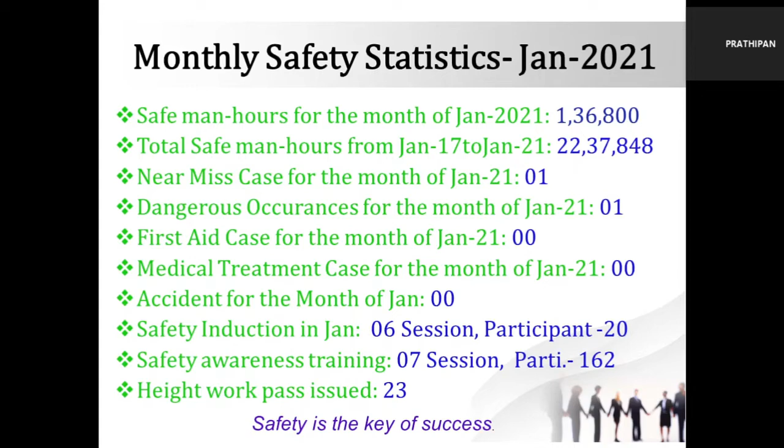Safety induction in January we have conducted 6 sessions and the participants were 20 including KPTL and Elemech. Safety awareness training 7 sessions and participants 162. Height pass has been issued, total 23 numbers in the month of January.

So the next one is the review of previous meeting.

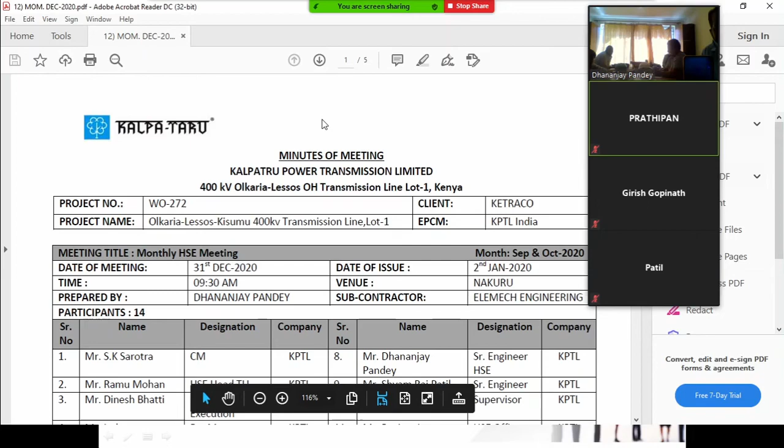Okay, so review of the previous meeting. Toolbox talk should be regularly conducted before commencement of the work and explain the work related hazards and control measures.

In the Krishna team, it has been reported that they are not conducting since last week. Mr. Tony.

We had an issue with the safety officer. I think we've been able to get a new steward then. Yeah, we've been able to get a new steward in his area. So I think from Monday they'll be able to continue the toolbox meeting.

Have you looked at the new safety steward for that site? I will meet him tomorrow. Tomorrow I'll be going to Naivasha. Okay, so I'll sit with him and at least just assess how he is and whether he actually knows what was expected of him.

Okay, yes, so please arrange one steward for the Krishna team. Okay, no problem, it will close on Monday. Yes, I will meet him on Monday.

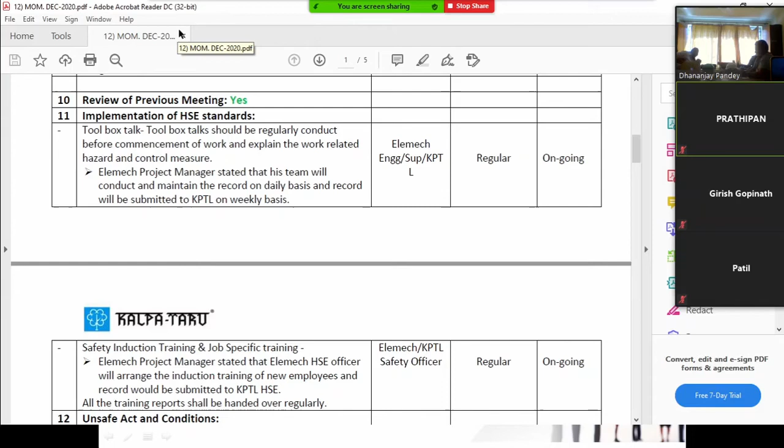Okay, the next point was unsafe act and unsafe condition. Safety lock of the single sheave pulley was observed in broken condition, so it has been repaired. The next one was wire rope sling observed in wear and tear condition, which is being used for pulling as a marking lead in manual team.

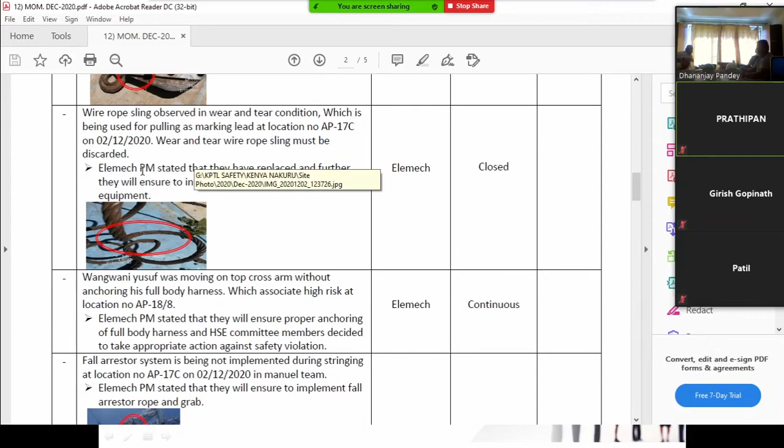That was replaced, I remember. That was replaced. The next point was Wangwani Yusuf was moving on the top cross arm without anchoring his full body harness, which poses high risk at location number AP 18 by 8.

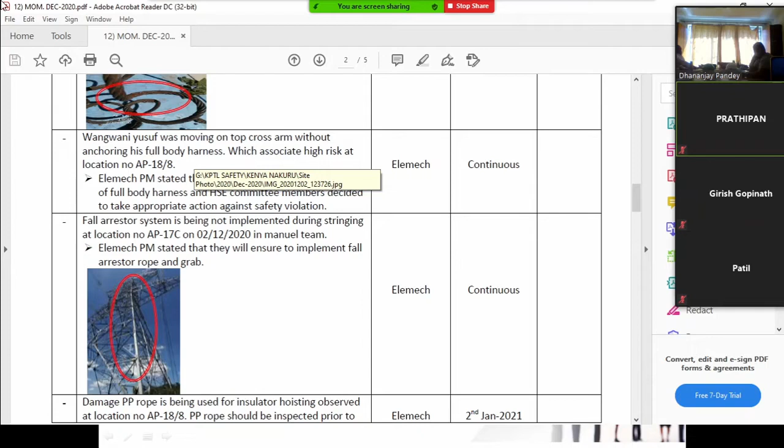No, but still the same unsafe practices are being done by the other teams. Some technicians are moving at height without anchoring their full body harness or safety belt.

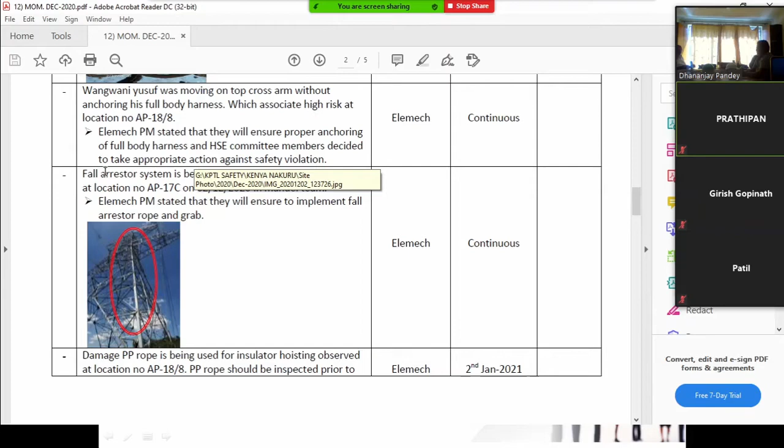We need to address this, because we don't know if any accident or mishap has ever been informed to anyone. Okay, then I think let's put emphasis on this in the toolbox meeting.

The next point was the fall arrestor system not being implemented during the stringing. So still we have the same issues in the month of December and January.

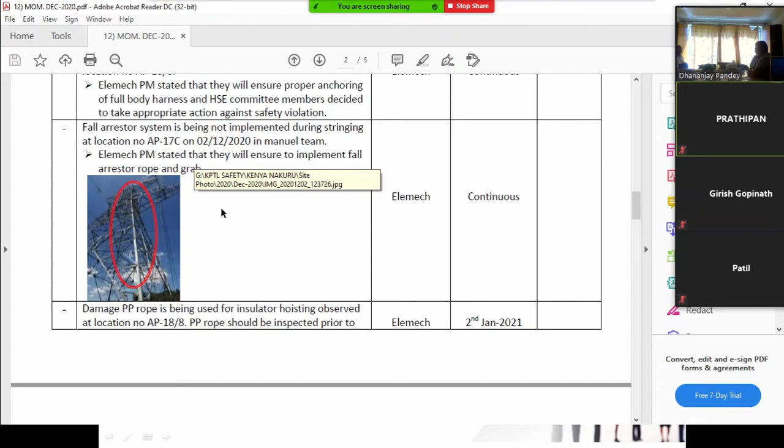This point has not been closed. They are not maintaining it continuously - the fall arrestor system, not the body harness - for climbing up and down safely.

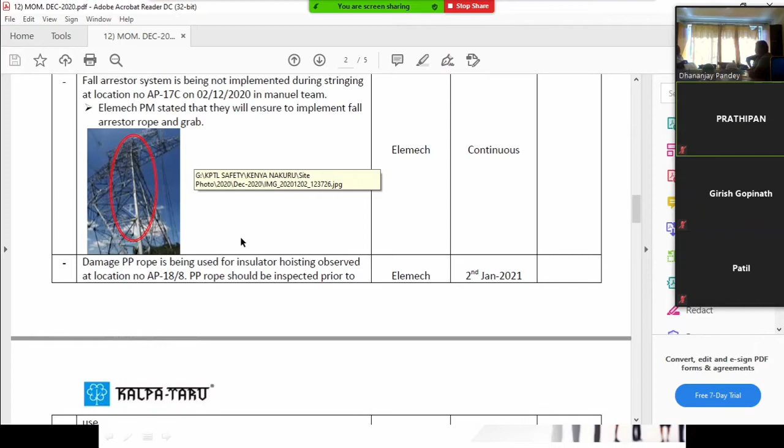Okay, let me put emphasis on this also. Please write down the points. It is for all the teams. Yes, the next one was damaged PP rope being used for insulator hoisting.

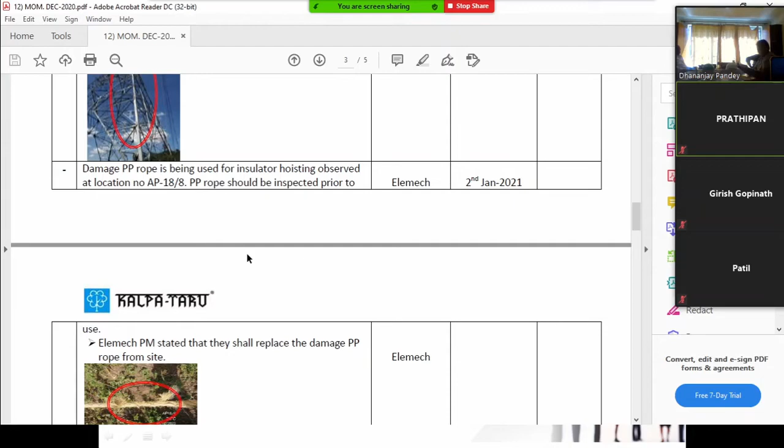Observed at location AP 18 by 8. It was observed in Banyan team. But one accident happened at manuel team due to the breaking of the PP rope.

Okay, so any unsafe observations which we find at the site have the potential to cause accidents, and that resulted in an incident at manuel team, so at least we need to focus on our tools also.

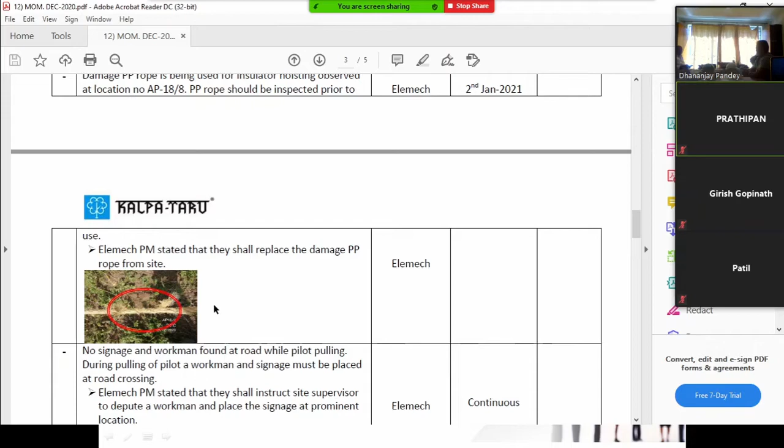If the PP rope has worn out, we need to replace it in a timely manner. There was damage to 3 insulators and the headman and other things also. So a small thing can cost a lot.

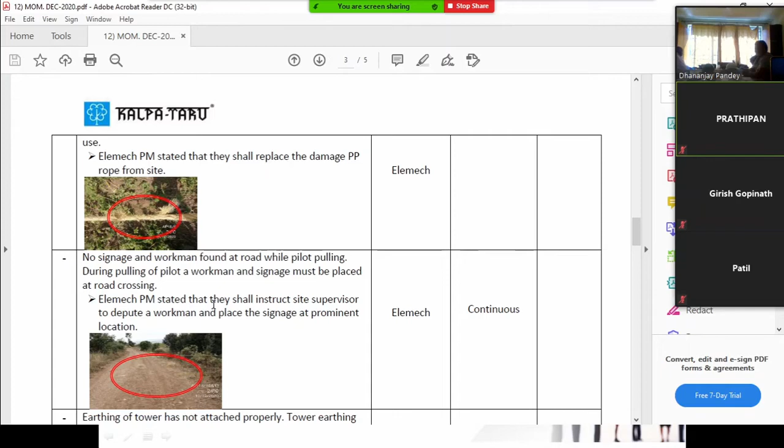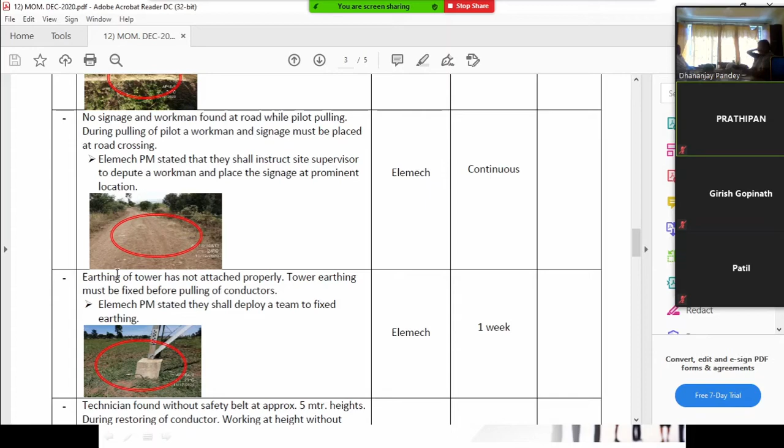The next point was no signages and workmen found at the road while pilot pulling. During pulling of the pilot, a workman and signages must be placed at the road crossing. I think we are able to get extra.

I mean, we could get some from your team also, and you're able to put them in frames and then distribute to the teams.

But that's why if there is an HSE steward, at least he can implement the requirements while crossing the road, and the requirement for checking the span before pulling and lifting of any materials.

Okay, yes, the next point was earthing of the tower not attached properly. Tower earthing must be fixed before pulling of the conductor.

Tower earthing - this issue is still at several locations. Even I have evidenced that they have done the welding and the earthing is still out of the tower. You committed that during welding of the tower you will fix the earthing, but they have only done the welding.

I have observed in area 3, around the Kidong area, some locations having quality issues with earthing. We've done the requisition for the materials. I think we should be able to address that either between tomorrow and Monday, and make sure those things are well arrested. But still the same issue is at several locations - the earthing of the tower.

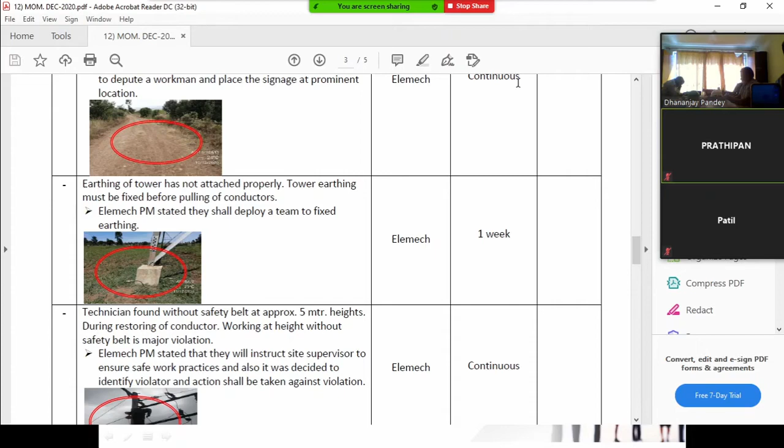No, Tony, this is the problem - it is unattempted. You have to deploy your specific team to rectify those earthing issues, because on Alesso's end, almost all towers have the same problem. Because of that situation, all wires and fittings are unsettled, so they need some JCB or chain pulley. Without those, they can't fix it.

It's better to plan with your excavator or JCB team for landscaping the soil, leftover material, and earthing issues. On that side I have Chandan - let me get hold of Chandan and just get the true picture of what's happening on the ground.

Due to those urgencies and for the performance of our progress, we had already ignored those issues, and we agreed it would be done later during panel checking. But we have already finished, so there is no time left. Okay, let me put it as urgent - please ensure, and whoever you give the responsibility to, please cross check, because we have seen that the welding has been done and the earthing is still out of the tower.

The next point was a technician found without a safety belt at approximately 5 meter height during restoring of the conductor. Working at height without a safety belt is a major violation. This is the problem of the site supervisor, because to speed up the work they don't focus on safety. The cost of calling a person is higher than the cost of wearing a safety belt - wearing it only takes 5 to 10 minutes. You're right, noted.

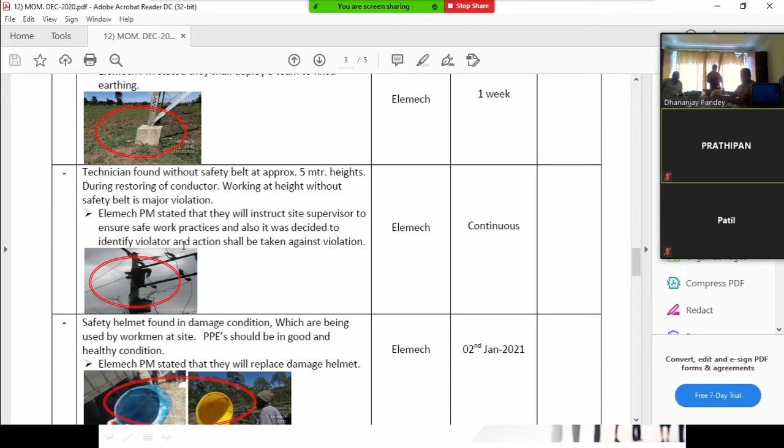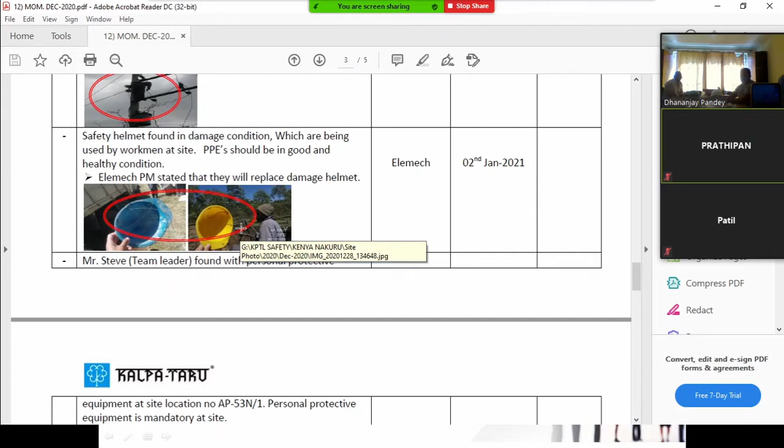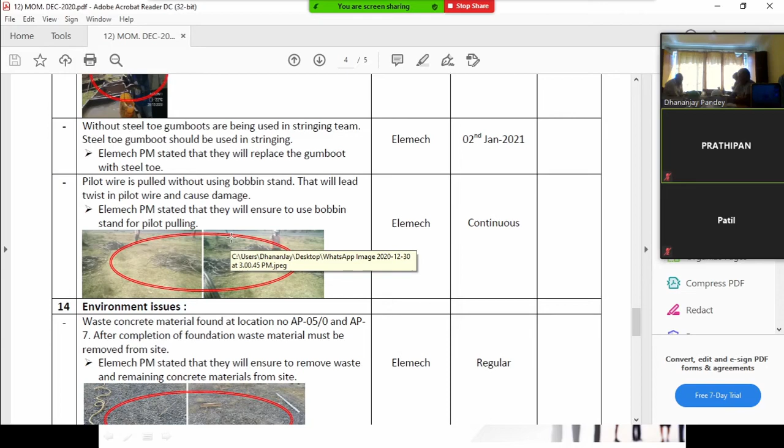The next point was waste concrete material found at location number AP05/0 and AP7. I think it has not been cleared yet. AP05/0 was clear, was collected, and it has been delivered. AP7 was waiting, and I think by now all of that has been collected from there.

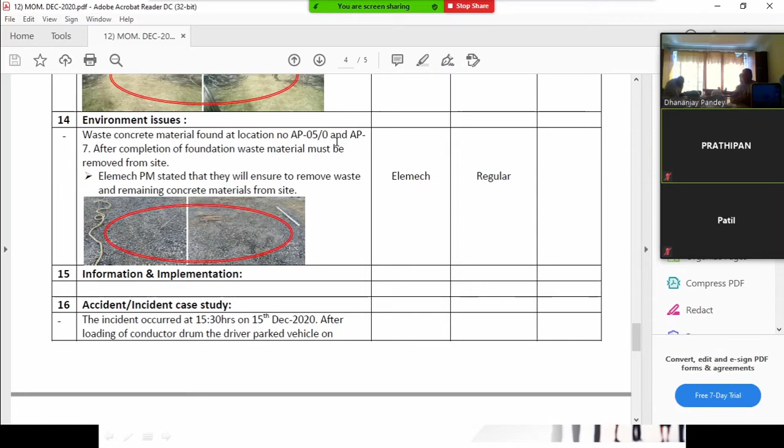Full length of the earth wire is on the ground at location number AP2X1A by 5. The whole earth wire is above the ground, outside of the pit. Even some villagers could open that and take the earthing wire for towing a vehicle. Please write down the location number and make arrangement to fix it properly.

Okay, I've already done that. The next location is AP6, also for the earthing.

Okay, yesterday's action item has been completed. So let me check tomorrow's.

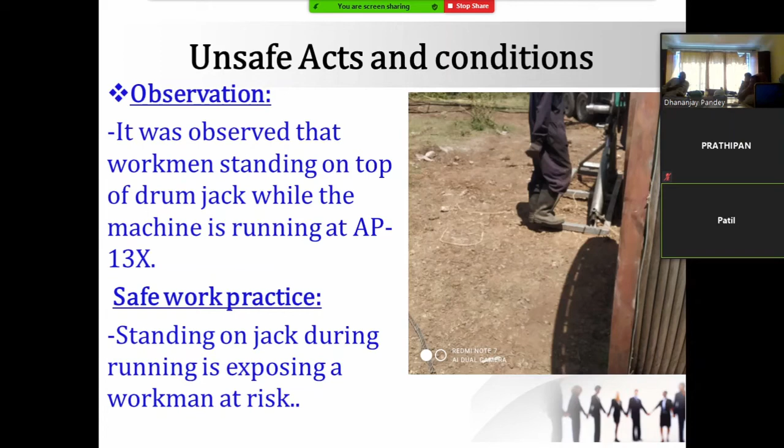The next observation is from the Krishna team. It was observed that the workman is standing on top of the drum lifting jack while the machine is running at AP13X. Please don't allow this, because due to the jerk the whole drum could go out. At least provide an alternative option to fix it with a J-type hook in the ground. Please find out this alternative solution. We can prepare the J-type hook and fix it to the ground, because we already had a serious incident, so it's better to take up safe work procedures.

The next observation is not guarding the wire rope for the sharp edges of the tower at location number 13X. It is very easy to wrap a gunny bag around it to prevent damage to our wire rope sling and also prevent damage to the galvanized coating. So please, Tony, when you visit the site, make them aware of these two things: one, the sling will get damaged, and two, the galvanized paint will get damaged. Please note that point, and in every stringing team make them aware to use the gunny bags and other bags we have, which can be fixed on tower members where we need to tie the wire rope sling.

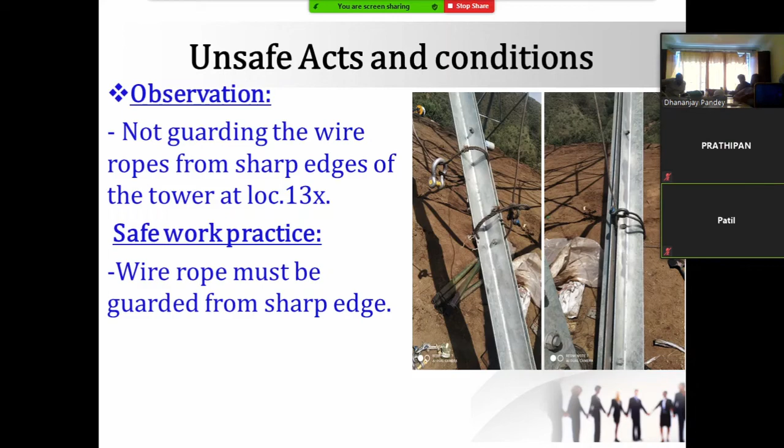The next one is a PPE issue observed at location AP3N, Krishna 3. Okay, the same point which we have discussed.

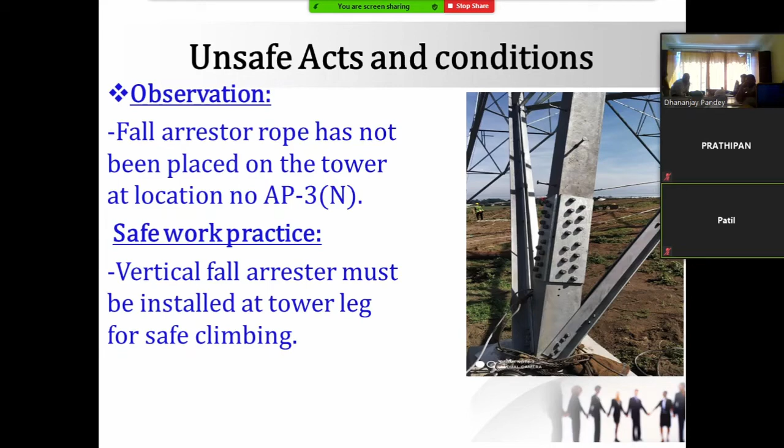The fall arrestor rope has not been placed on the tower. I told you last time too, at the same point, that they are not implementing this safety measure. This is also at AP3, the same place and same location. Please ensure to provide the safety stewards, and they will ensure this requirement is implemented. I am putting this point to be closed tomorrow, but this is a day by day activity and we need to keep implementing it.

The next point is the first aid box, which is also unequipped. Same thing, purchase it tomorrow. Please purchase two or three sets and distribute them across the whole site. Tomorrow you have to visit for the salary, so I request you to buy the materials and distribute them at every site where there is a lack of first aid materials.

The next point is related to PPEs. Lack of PPEs observed in the 5th stringing team near the drum, working without steel toe footwear near the drum is too dangerous, because anytime while shifting the drum it might roll over the leg. Please ensure whoever is working near the drum is provided with steel toe gumboots or steel toe safety shoes. This is in the Gurmeet Singh team, the 5th stringing team.

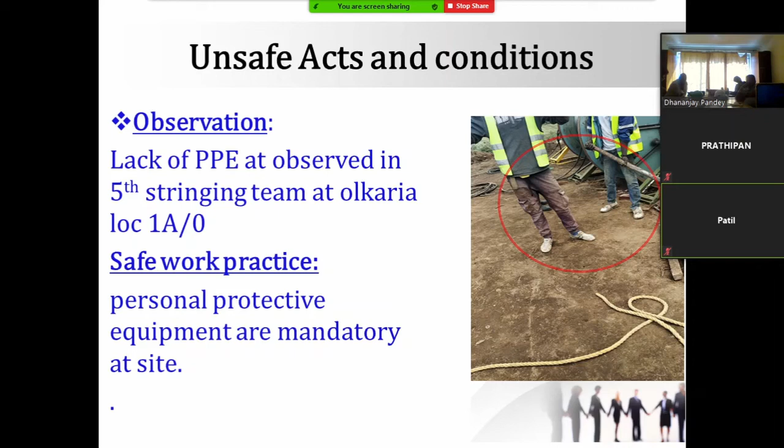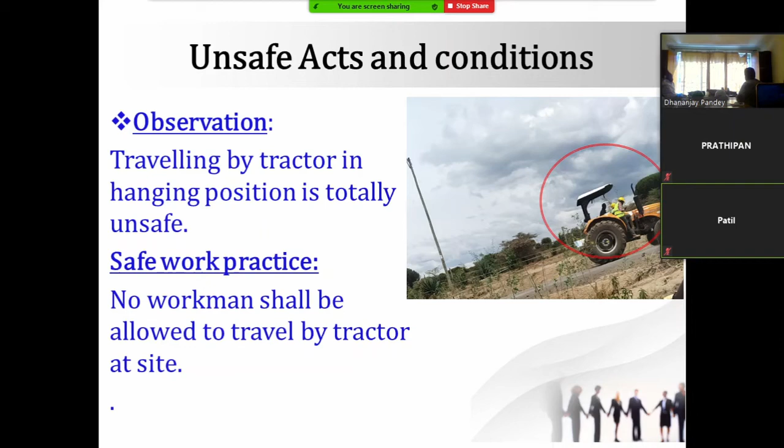The next point is traveling by tractor in a hanging position, which is totally unsafe. You can see how the workman is traveling on the tractor. Anytime, due to vibration or a jerk, he might lose his grip and fall directly under the tire. So traveling by tractor like this is prohibited. Please communicate at the site to avoid these unsafe practices and take immediate action on that.

The next point is an environmental issue. Waste plastic material and used oil were found at location AP4B/0. The major issue is that whenever they are doing servicing, they throw out the used oil onto the ground. Please ensure the waste oil is collected properly and not thrown on the ground.

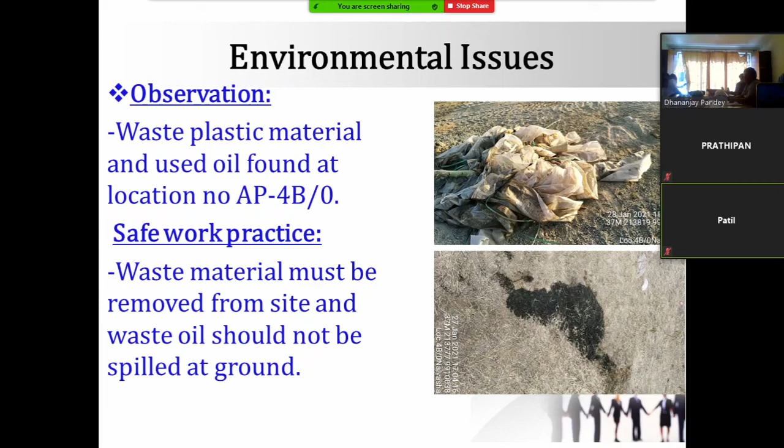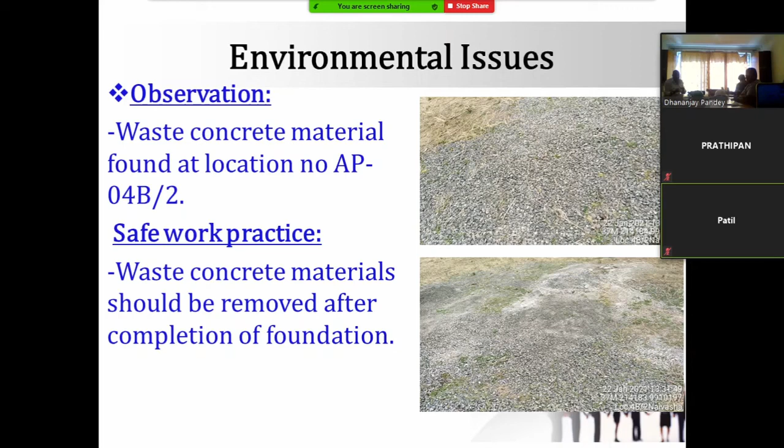The next point is waste concrete material found at location AP4B. You said it has been removed, but AP4 and 5 are just nearby and it is still there, and it is a large quantity, you can even see it. Please visit and try to remove this waste material from the site.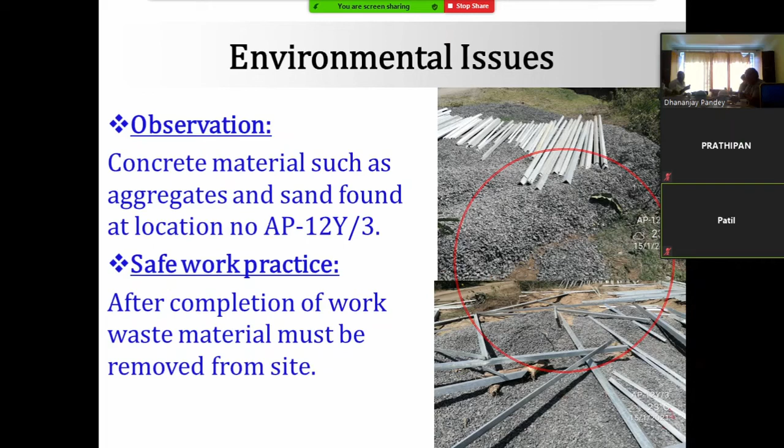The next point is incidents and near misses. As we are aware, Wasley was holding the OPGW pilot wire between AP9 and 10 road crossing with four other workers on 5th January 2021. Communication was passed to release the pilot wire.

Other 4 workers left the pilot wire, but Mr. Vasily was still holding it. Within a fraction of a minute, he was pulled up to the bottom conductor height. The site supervisor advised him not to leave the pilot wire and slowly shift onto the bottom conductor which was near the pilot wire. He was then rescued with the help of a rope from the bottom conductor. Fortunately, there was no harm.

So at least we need to insist on implementing safe work practices to save the workmen. Everyone is very well aware of the cost of an accident even if it is minor. So what will happen if there is a major accident?

We need to focus. The next incident was while shifting the tensioner machine from 19Y section to 34D section. The tensioner machine was being shifted by the tractor. On the way, the pulling hook of the tractor broke suddenly due to worn-out.

The additional wire rope sling was attached with the tractor to the tensioner machine as a safety purpose. Due to that safety sling, nothing happened. The worn out hook point had been shown by the site engineer several times for repair, but the site representative was not serious. Ultimately, if there had been no extra safety sling, the tensioner might have gone off the road.

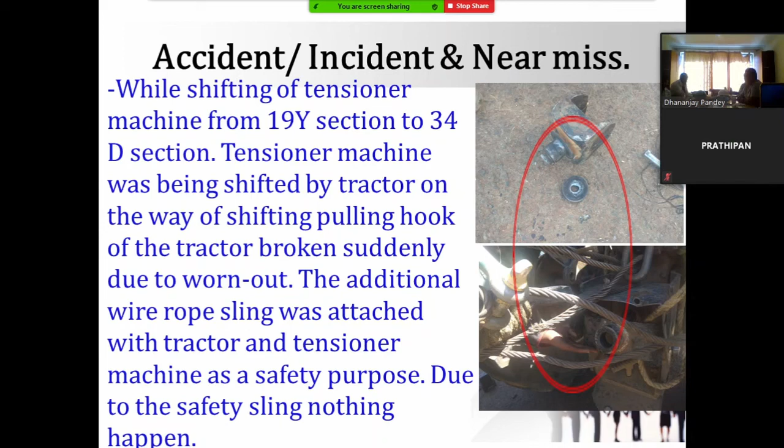Okay, the positive visible changes. Any other observation from my side, team? So positive visible changes such as the project manager's site visit and safety interaction.

So what I request, Mr. Tony, whenever you are visiting the site, arrange a meeting with the workers also, because that will boost their morale. In safety, if you hammer it every day, the workers or the person at the site will remember what to do.

Implementation of the voltage detector. Whenever we are doing a shutdown, we need to cross check with the detector, because several incidents in other projects happen after shutdown without checking. They went to open the conductor or something and got electrocuted. So it's better to ensure this prior to doing any work.

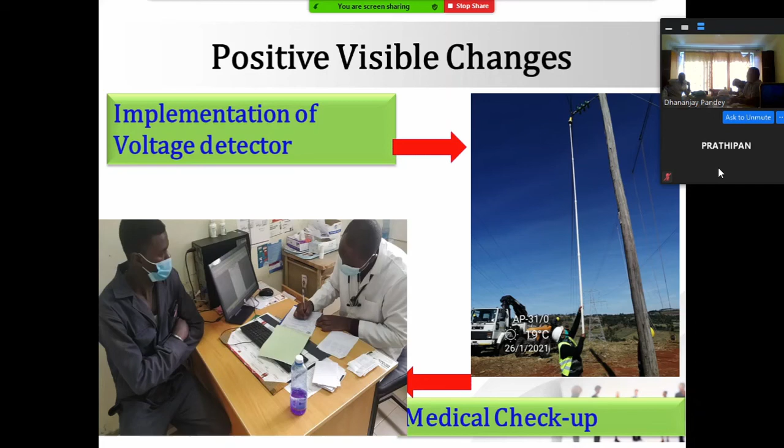At road crossings, we need to provide a flagman and danger signpost. Sometimes it has been observed that wherever there is a road crossing, they fail to implement such safety precautions. Safety is not for show. Safety is to save the life of someone.

Okay, the next one is the labor report for the month of February 2021. From your end, it needs to be submitted on the 2nd of March, for every month on the 2nd, because we have to send the report on the 4th of every month. We are getting delayed since 2 and 3 months, and I have to take follow up every time.

So please make it on time. The next monthly meeting will be scheduled in the second week of March. This is tentative. So now I'll request from our side, team.

Discuss those issues, Tony. Regarding the flamingo area, they are very much concerned about people traveling on the backside of any cargo vehicle, just like a truck or tractor. They didn't allow anybody to travel in that situation. We are also getting several calls from the administration regarding flamingo, but anyhow, we have come out from that section.

Yes, we take care. And next, where we are working at Royal Home and Marigati farm, there are also some white guys there. They are very much strict, keeping a concern for the transportation and speed of vehicles in that area.